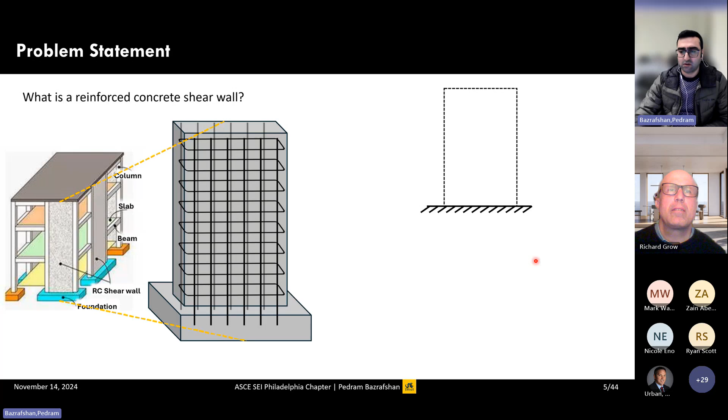So, problem statement. First, I would like to talk about what is actually a shear wall. Most of you know that. We have different structural elements which have concrete shear walls. Of course, they cannot take tension, so we reinforce them. And if we look at this layout for our reinforced concrete shear walls, they're supposed to take lateral loads that push these structural elements toward left or right, and these cause different crack patterns on the surface of these structural elements.

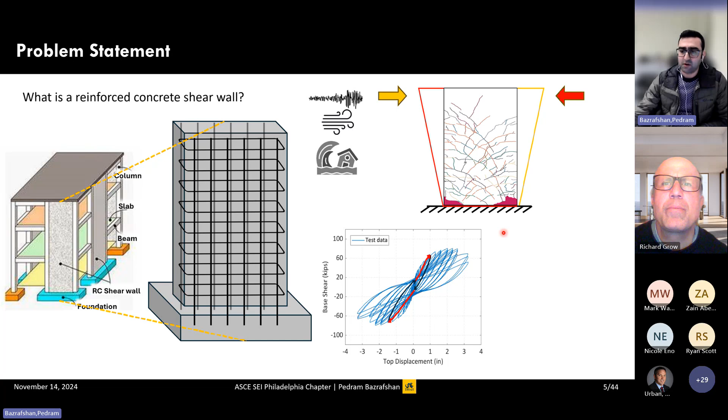Once they are put into testing, we usually plot the results with base shear versus the top displacement, and here we see different cycles of the test. We load the structure, unload it, and load it to the other side, and then unload it again. Each of these crack patterns that you're seeing here in this GIF is coming from an image after one full loading cycle. So after one full loading cycle, we stop the test, we take an image, draw the crack patterns, and then we continue the test.

These blue lines would give us the hysteresis loops of the test, and if we connect all these peak strengths, it would give us this green line. We call it the backbone curve.

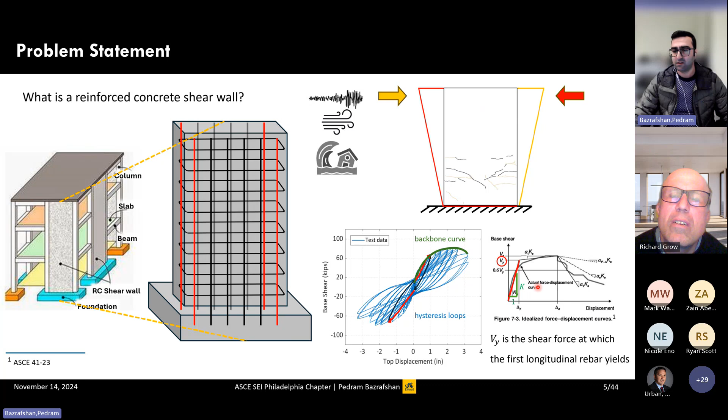There is an idea. I'm trying to set these terms because I'm gonna use them throughout the presentation. So there is a guideline by ASCE 41. I'm gonna talk about ASCE 41 as well. They suggest a way to convert this backbone curve to the idealized force displacement curve. So for that, we have to find Vy, which is the shear force at which the first longitudinal rebar yields, which would be usually these folks that are at the far end of each side of the wall. And then if we connect from 0 to 0.6 times Vy, we would be able to get the initial stiffness of the wall.

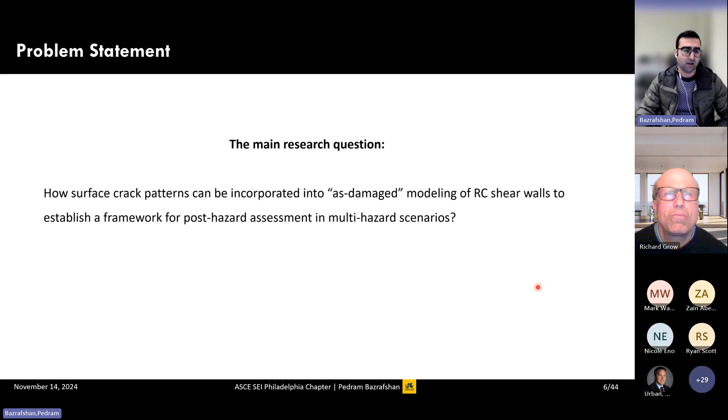With that, the main research question that we want to focus here is how surface crack patterns can be incorporated into as-damaged modeling of RC shear walls to establish a framework for post-hazard assessment in multi-hazard scenarios. There are different elements in this research question, and I would like to walk you through visually.

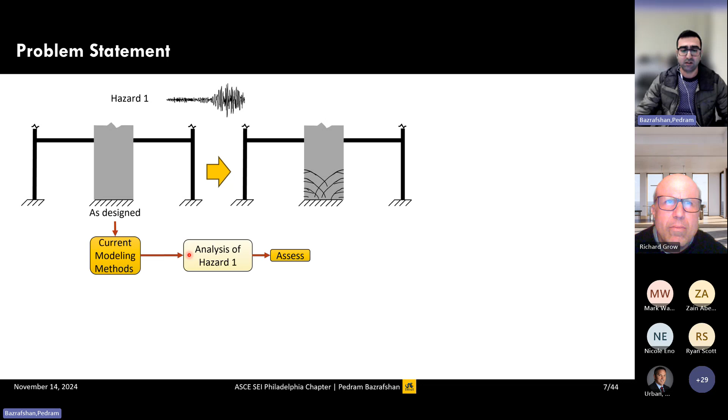So we have a structure and we have the shear wall, and it experiences hazard number 1. With that, we get to this stage that some crack patterns are developed on the surface of the wall, and then we try to make a performance assessment. And this is the current modeling method that we have. We do the as-designed modeling. We perform the analysis of hazard 1, and we then do the assessment.

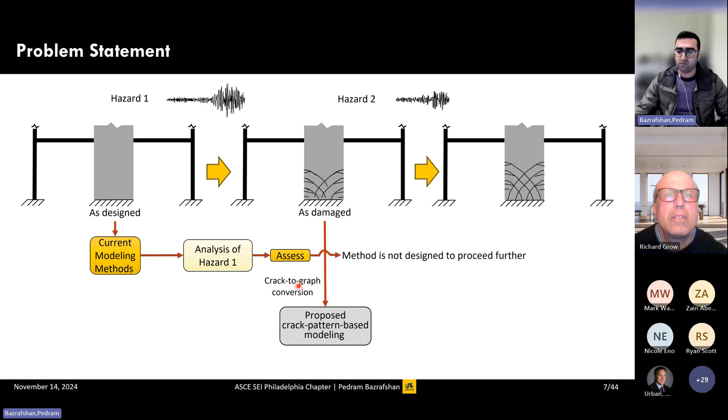But what if we have a second hazard? So as you can see, the crack patterns also develop. And the issue is that this method is not designed to proceed further. But our focus is that we do the as-damaged modeling of the concrete shear wall at the various stages that we're seeing here. So to do that, we want to convert the crack patterns into graph representation. And based on that, we would like to analyze the structure from the second hazard.

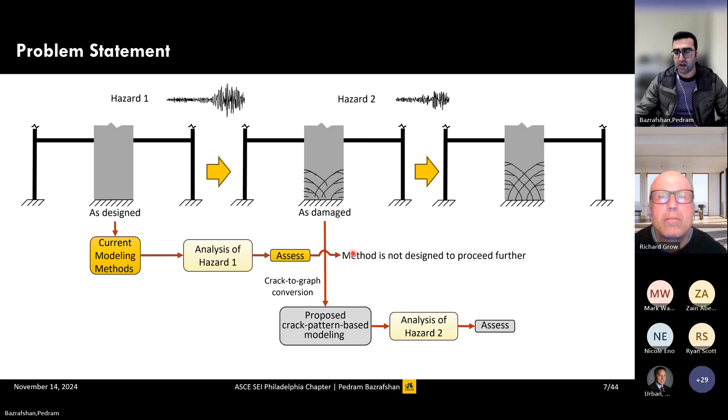Now that we know the problem statement, let's go to the significance and motivation behind the problem statement. There are two major motivations behind this research. The first one is the increasing frequency and intensity of natural hazard events due to climate change combined with the risk of multi-hazard scenarios. So the first one is the increasing trend in induced seismicity. And the second one, some climate change mitigation measures have seismic side effects, such as geothermal energy harvesting and CO2 injection into the ground.

Specifically in the region of Pennsylvania, we have high activity due to these seismic events, which are produced usually by people. That's the reason we call them induced seismicity. One of them is really known for fracking. The third one is that climate change exacerbates the severity of cascading natural hazards following an earthquake, such as the tsunami.

And the last one, climate change may increase the number of natural earthquakes through mechanisms like drought-driven changes in lake water levels or alterations in glacier volumes. The last one is not proven yet, but researchers are trying to investigate the idea because they believe due to global warming, the glaciers are melting down, and this change in the balance in the mass volumes throughout the Earth may cause some earthquakes.

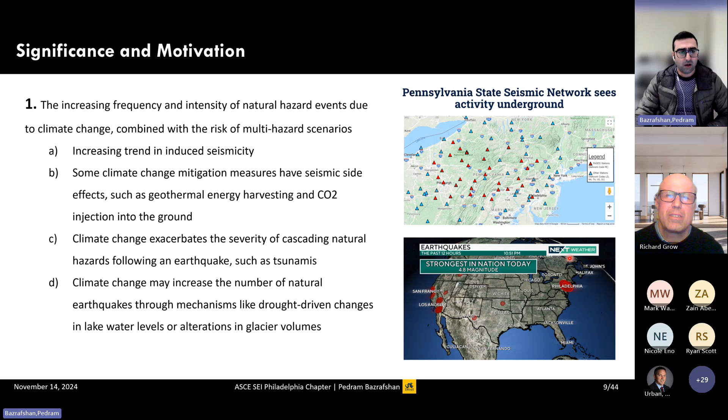A few months ago, if you remember, we had an earthquake in Philadelphia, and it was really rare. And I was watching the news. It was rare to the point that the news was defining what an earthquake actually is to the people. And if you wonder what a 4.8 magnitude earthquake looks like, a 4 to 4.9 magnitude earthquake typically has a maximum modified Mercalli intensity of 4 to 5. And usually the description corresponds to the things that I have written here. What captured my attention was that walls make cracking sounds.

And specifically in the Philadelphia area, wind load dominates, and it is not a high load. And the structures are not designed for seismic activities. And these descriptions are for the situations that the structures are designed for seismic activities. So it is something that we should be noticing for future events.

And the second motivation is the significant gap in current building codes and guidelines when it comes to assessing the performance of structures that have already sustained damage from one hazard and are subsequently exposed to another. So this is ASCE 41-23 that I mentioned earlier. It is developed for seismic evaluation and retrofit of existing buildings. We have the same name for the ACI version, which has a weird name, ACI code 369.1-22. And the last one is from the Applied Technology Council. It is FEMA reports 306 and 307.

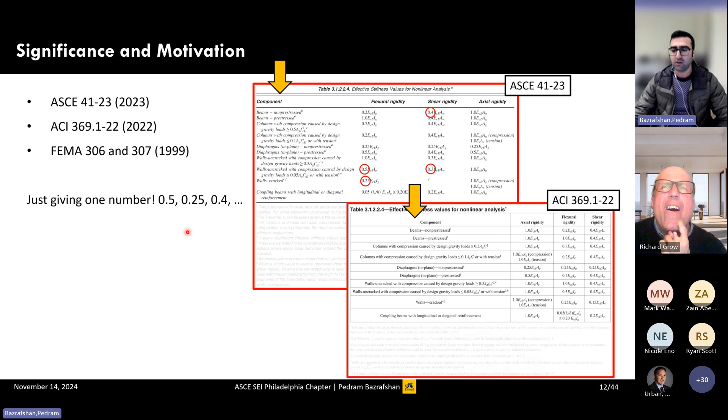But what do we mean by there is a gap in the performance assessment? I would like you to notice the first column here that we have, which corresponds to the structural components. And the issue is that these codes say if you see walls are cracked, just reduce the capacity by 75%. And if you see something else, 0.5, 0.25, 0.4, it's just giving one number. There's no description about it.

And we want to know how many cracks, what type of crack, does the length of the crack matter? Does the orientation matter? But these are not presented in the ASCE 41. So we don't know what to do. And actually reducing the capacity of the walls by 75%, I think this is really conservative.

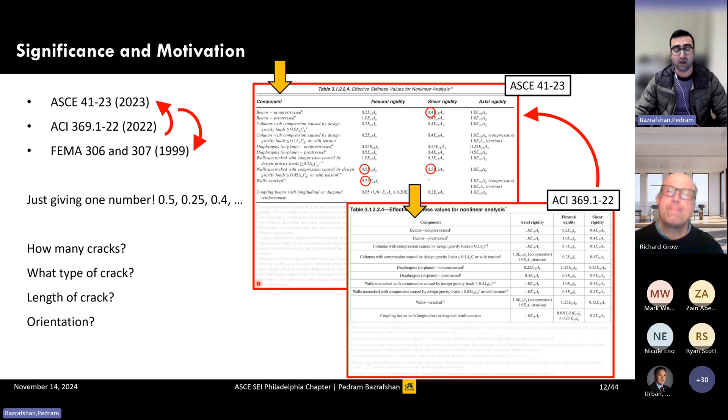So here ACI refers to ASCE. These two tables are very much the same. And these two refer to FEMA 306 and 307, which is really old. It is from 25 years ago, and we're talking about this matter in 2024.

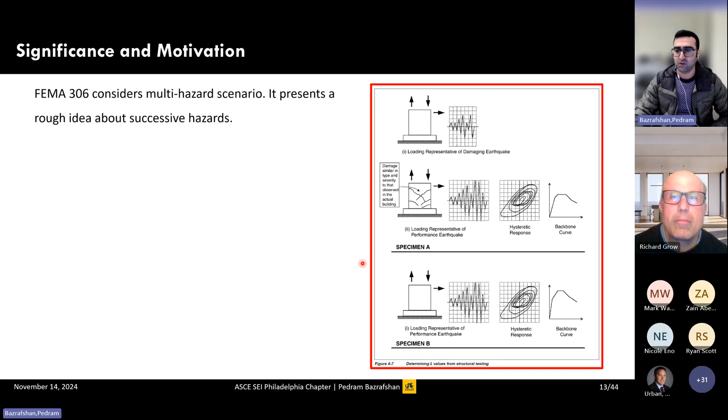So what does FEMA 306 actually consider? It considers multi-hazard scenarios. It presents a rough idea about successive hazards. They had an idea 25 years ago that we have a wall, it goes under one damage, it develops some crack patterns, and we want to perform some assessment after the second hazard. And they compared specimen A and specimen B. For specimen B, there is only one hazard. So we want to be able to compare these two events.

So I think there was a generation of researchers focused on seismicity back then. Maybe they knew the issues, but they faced some limitations. And after 25 years, probably they are retired right now. 25 years ago, there were limited tests, and therefore they only had the rough idea to present, but they couldn't move forward probably.

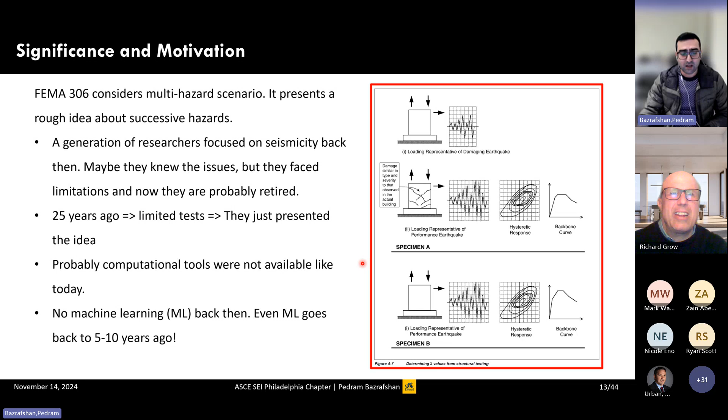Another thing is that probably computational tools were not available like today. We have access to high performance computing systems, and it wasn't available back then. And even if it was, probably it was for military usage. The last one is that machine learning was not available back then. Machine learning only goes back 5-10 years. And also test data is still limited for AI and machine learning. I'm going to talk about what I mean by limited test data and why it is actually limited.

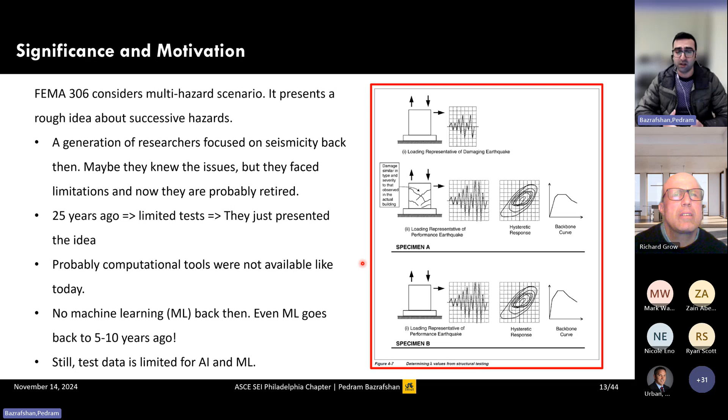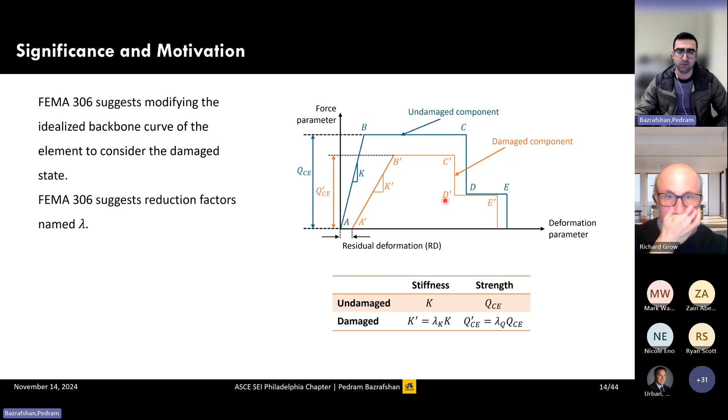So what does FEMA suggest? FEMA suggests that we can modify the idealized backbone curve that I mentioned in ASCE to represent the damaged state of the structure. So initially, they believe that if this is the blue line, the undamaged component, we should be able to define some lambda values that if we multiply these lambda values by the initial stiffness or initial strength, we should get to the damaged state of the component.

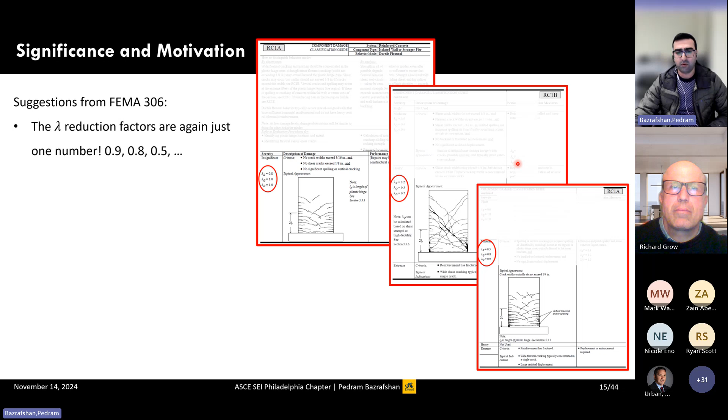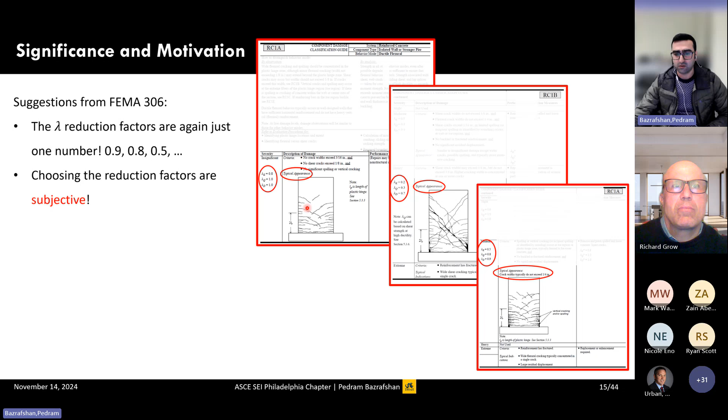But what we actually see in FEMA 306, this is why I'm calling it a rough idea, it was not developed further. I grayed this part because I just want you to focus on the other parts. But the issue is still there. It's only giving us just one number, and where is that number actually coming from? Again, it is 0.9, 0.8, and it is basically saying that if the typical appearance of the crack pattern is something like that, choose those numbers, and it is pretty subjective. One person might think the actual crack pattern that they're seeing is close to this one, another to that one.

Another issue is that here it mentions crack widths typically do not exceed a quarter of an inch. But crack width closes under cyclic load. If you look at this video, you can see under cyclic load, the width of the crack closes. So it's not a reliable measurement here.

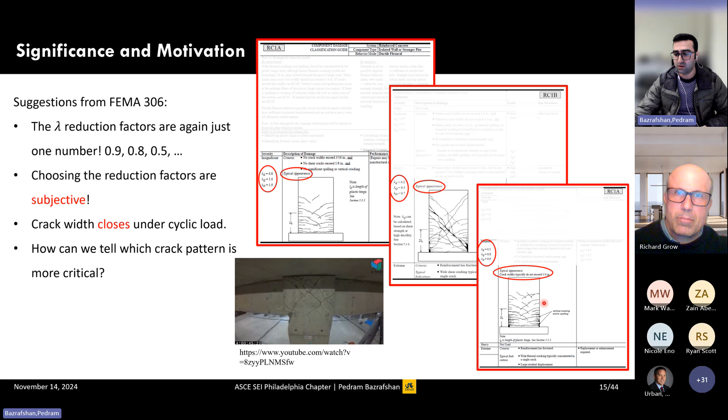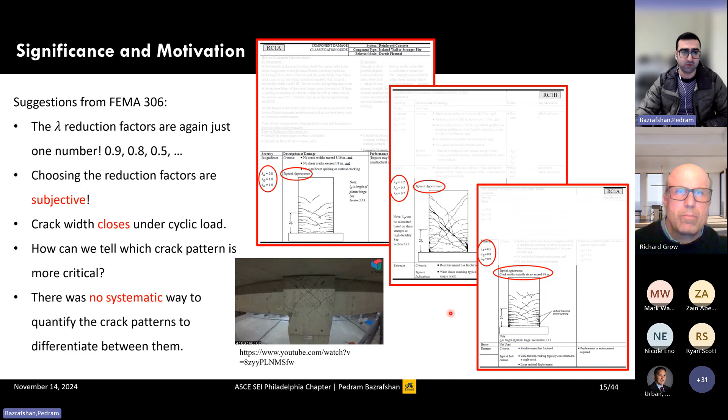But the question here is how can we tell which crack pattern is more critical? Is it this one, this one, or this one? What is the difference between them? Which one is worse? So I can say there was no systematic way to quantify the crack patterns to differentiate between them. So this is one of the motivations of this presentation.

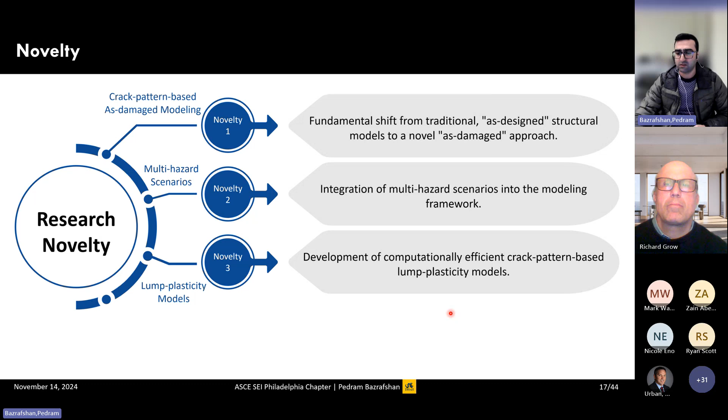Now, what is the novelty of our approach? The first novelty is a fundamental shift from traditional as-designed structural models to a novel as-damaged approach. The second one is the integration of multi-hazard scenarios into the modeling framework. Third is development of computationally efficient crack pattern-based lumped plasticity models. I would like to highlight the computationally efficient part. I'm going to refer to it in the conclusion section.

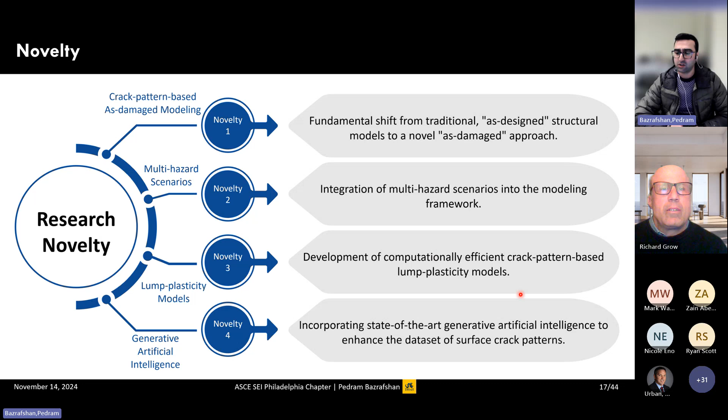And the last one is incorporating state-of-the-art generative artificial intelligence to enhance the data set of surface crack patterns. With that, let's move to the research objectives. So we have the experimental data that I showed you in part in the first slide, the hysteresis loops and the crack patterns. We have that for several tests that have been performed in the US.

We would like to first expand this data set by using AI, and then we would like to convert the crack patterns into their graph representation and use those graph features to be able to predict the reduction factors for the stiffness and modify the lumped plasticity modeling. On the other side of the branch, we would like to simultaneously develop the distributed plasticity modeling.

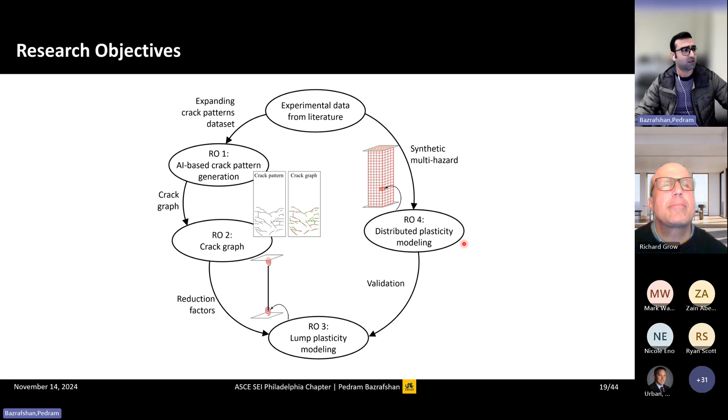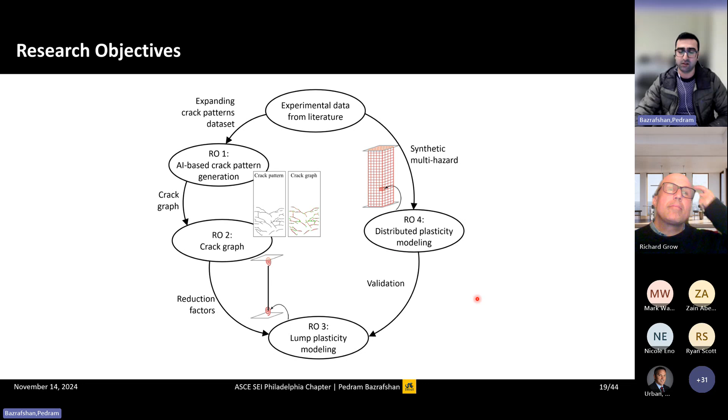This would give us the superiority to compare the results from the finite element here, which is very detailed, and compare it with the lumped plasticity modeling, which is a little bit simplified.

Now, the first objective, AI-based crack pattern generation. So here we used denoising diffusion probabilistic modeling, which was presented in 2020 by Ho and his colleagues. The idea is that if we have an image of a crack pattern, and we add noise to this image gradually until it is pure Gaussian noise, usually in very gradual steps, like 1,000 steps, we should be able to train models that denoise the images step by step until we get to the initial image.

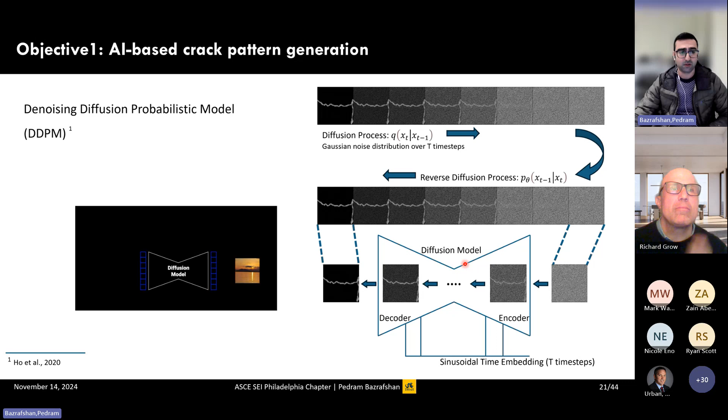So if you wonder how the model generates crack images, the idea is that once the model learns how to go from pure noise to the original image, if we give the model random Gaussian noise, it would eventually be able to denoise the image until it generates new images for us.

So with the first objective, there are 3 tasks. For the first task, we wanted to see the feasibility of this generation. So we generated 64 by 64 patches of images. That's why the images you saw were really small. And we have a journal paper under review on this task. The second one is that we want to generate higher quality images of 128 by 128 patches, which is essentially 4 times the images we generated before.

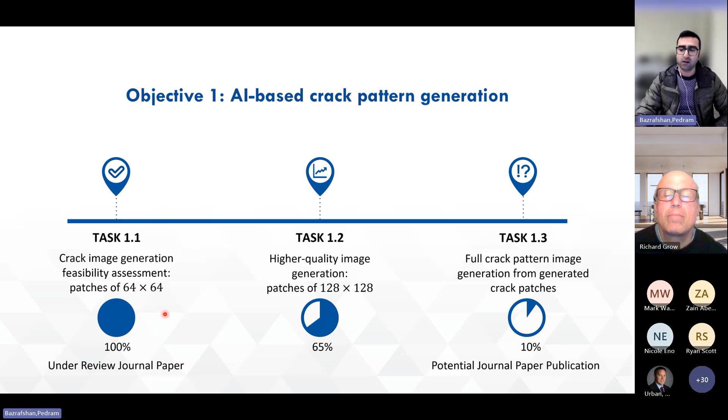And it is really resource intensive when you want to generate images with higher quality. And at the end, we want to be able to connect these patches so that we have the full crack pattern of the image.

The next question is why we use graphs. The first one is that it is based on mathematics, so it would be unbiased. If you remember, we talked about the subjectivity of understanding different crack patterns. So mathematics gives us the benefit that it is unbiased and can objectively compare these crack patterns with each other. Second, graphs are the building blocks of AI, and they enable automatic and systematic analysis.

With this, we would be able to assign numbers to these crack patterns, which is called crack pattern quantification. Essentially, we're converting something qualitative to something quantitative. This way, we will have a way to tell which crack pattern is more critical or which one is worse.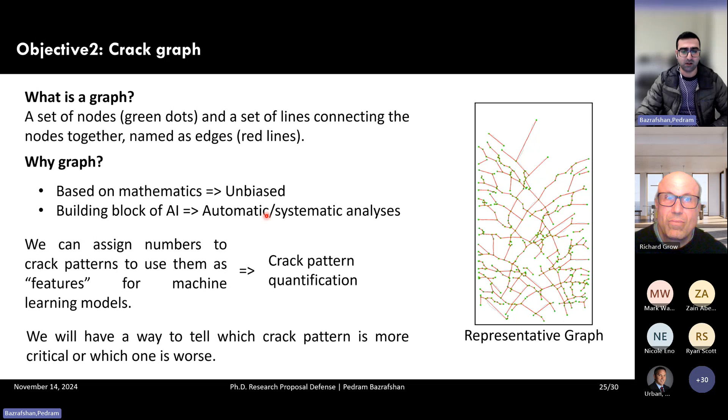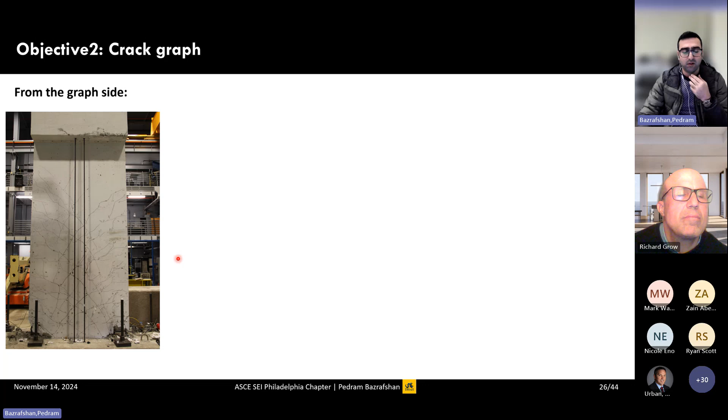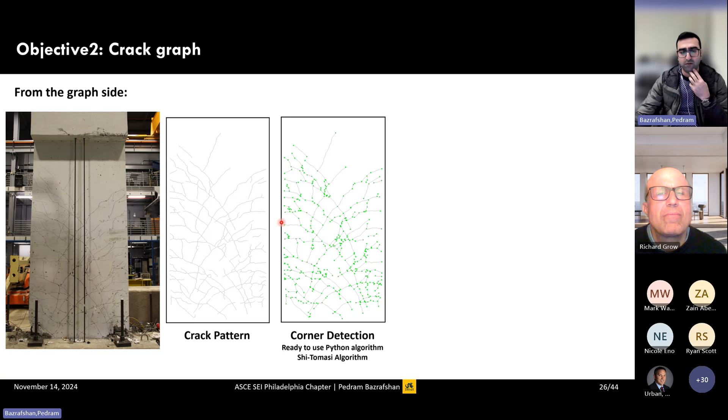The crack to graph conversion has two sides of the story. Now, I would like to start with the graph side in the beginning. So this is an image of the shear walls that go under test in the laboratory, and you can see crack patterns developed on the surface. So what we do, we sketch these crack patterns at the beginning, and then we use corner detection algorithms. I specifically used the Shi-Tomasi algorithm to find the starting point, crossing point, and end point of these crack patterns, and we mark them with these green dots.

These would be our nodes. Now the idea is to connect these nodes together based on the crack patterns. So we developed another algorithm to connect these corners together. We call it corner connection. So here it visualizes the idea. For example, node number 2 and node number 6 should be connected to each other because there is a crack pattern connecting these two together. But nodes number 2 or 3 shouldn't be connecting to 1 because there isn't a crack pattern. If we follow this guideline, we can see that the crack pattern that we had initially here is now converted to its representative graph.

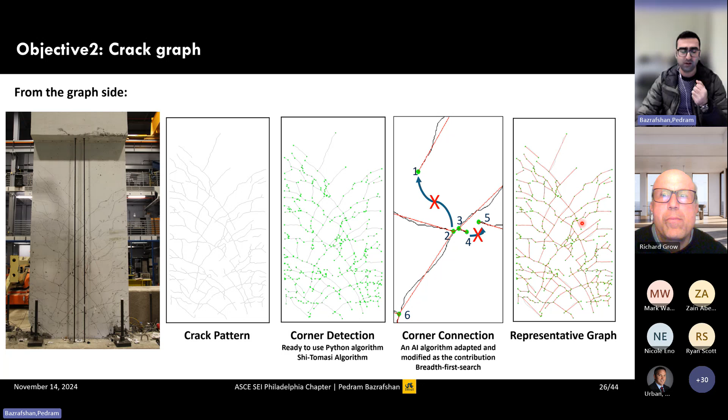Now that we have the graph, we would like to extract graph features to assign those numbers that I mentioned to the graph representation. So imagine this is a network. This is a graph that we have. This is how we calculate the graph features. For each node, we count the number of edges connected to it, and we give a number to these nodes. We call these numbers node degrees. For example, here we have 3 edges coming to this node, so its node degree is 3, this one is 2, and this one is 4.

One of the features that we use here is called average degree of network, which is simply averaging these numbers out. And with that, we get this plot. As you remember, for each of the load steps that we had, we stopped the test and we had the crack pattern. And if we convert the crack pattern into a graph and calculate the average degree of network, it would give us this point on the curve.

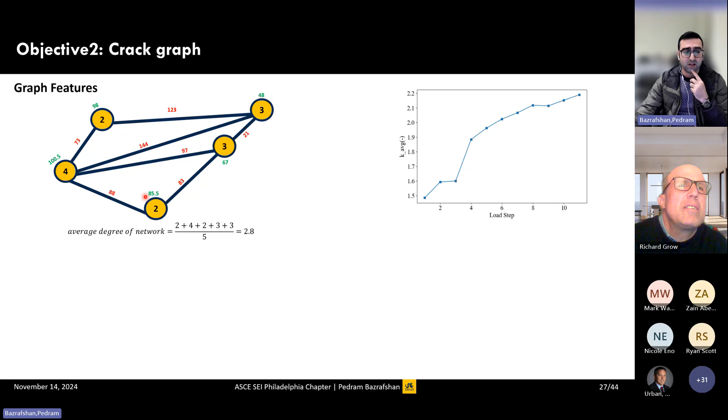The second feature I would like to mention is, for example, we have this crack length. Imagine these red numbers are showing the length of these cracks. The weighted degree of the network would be the average of these two numbers. For example, for this node, that would give us 98. And then if we do the same for all of the nodes, we would be able to get the weighted degree of the network. If we average those, we would get weighted average degree of the network, which would be the average of these green values.

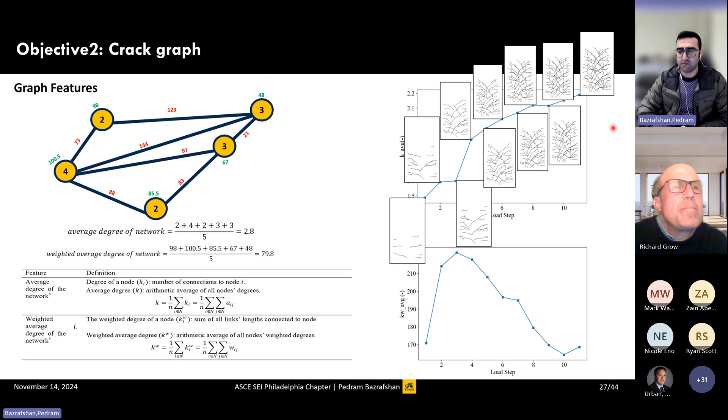And for each of the crack patterns, we should be able to plot weighted average degree of the network versus the load steps. You can see the crack patterns are developed through the test, starting from some disconnected cracks, and at the end we have a very intense cracking pattern at the end of the test. And of course, these graph features have mathematical equations.

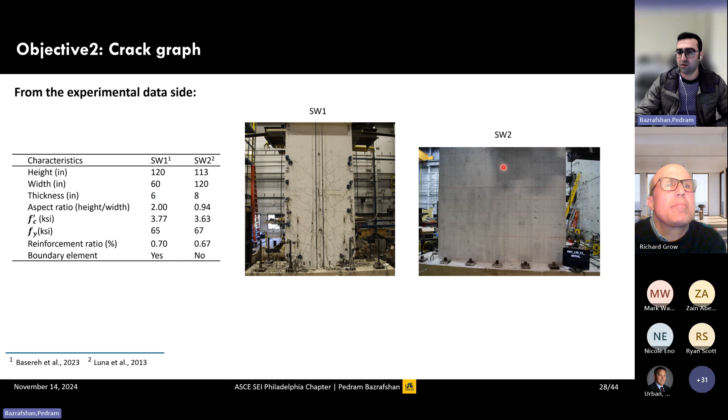Now that we learned about the graph side of the story, let's move to the experimental side of the story. So these are the two shear walls that we wanted to use to test our idea. The first one is called SW1, shear wall number 1, and shear wall number 2. These are the characteristics of the walls. If you wondered, they are called large-scale tests because if you compare them with the average height of a person, they are still taller. Even if you are 7 feet tall, these walls are still taller than you.

And these are really expensive tests, and this is the reason that I was mentioning there is limited test data, back then and still now. To give you an idea, the actuators that are used to push and pull the top of the wall cost hundreds of thousands of dollars, if not millions. And only a few schools in the entire United States have the ability to do large-scale testing. This is why these test data are really precious and really rare.

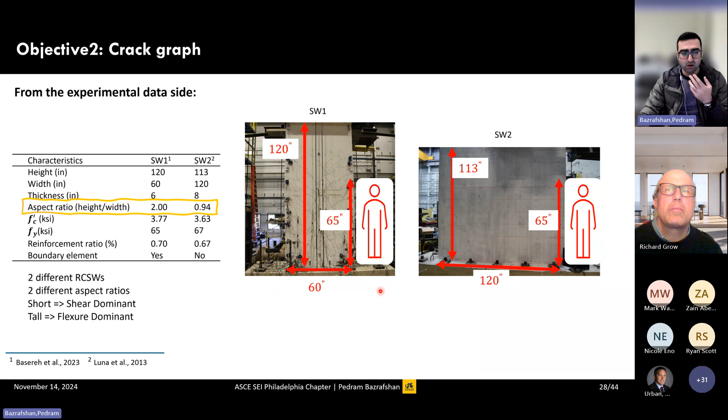So we have here two different shear walls, and they have two different aspect ratios, which usually show the dominant behavior of the wall. If it is less than 2, they are usually considered to have shear dominant behavior, and if they are 2 or above, they're usually considered to be flexural dominant.

So these are the hysteresis loops that I showed you earlier. It is showing base shear versus the top displacement. If you remember, our goal was to find these lambda values that, if we multiply them by the initial stiffness, we would be able to get the stiffness for the damaged state of the wall. So for that, again, I'm showing this graph. We use the idealized backbone curve. So first we have to find Vy, and then we multiply that by 0.6 Vy, and this would give us

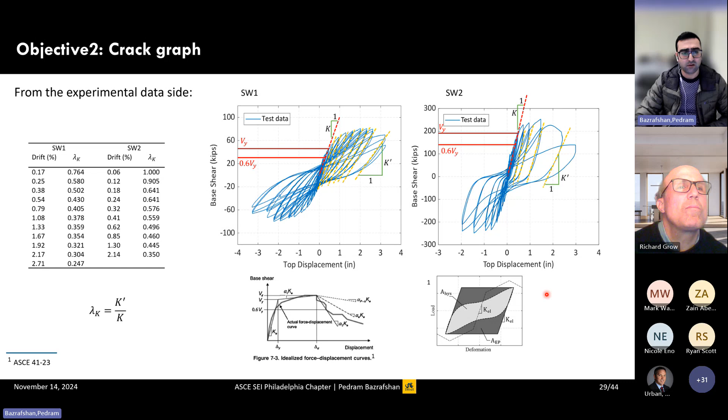the initial stiffness. For the damaged state, one of the issues that we had throughout this project, you're hearing the success story, but we had to go back and forth between these guidelines, ASCE, FEMA, to define different parameters. So to get the stiffness of the damaged state, ASCE suggests to use the unloading slope for that purpose. So we got these slopes from the unloading slope, and it gave us the stiffness of the damaged state of the structure. And with that, we were able to calculate the lambda values for both of the walls.

Now that we have seen the story from the graph perspective and from the experimental perspective, we have to marry these two worlds together. So remember that we had this crack pattern, then we converted the crack pattern into its representative graph, and we want to get some numbers to be able to convert the undamaged state to the damaged state. So these are the lambda values that I showed you in the previous slide and in the table. This is the ground truth, and we use the graph features to predict these lambda values. And as you can see, we're getting a pretty good match between the ground truth and the lambda values.

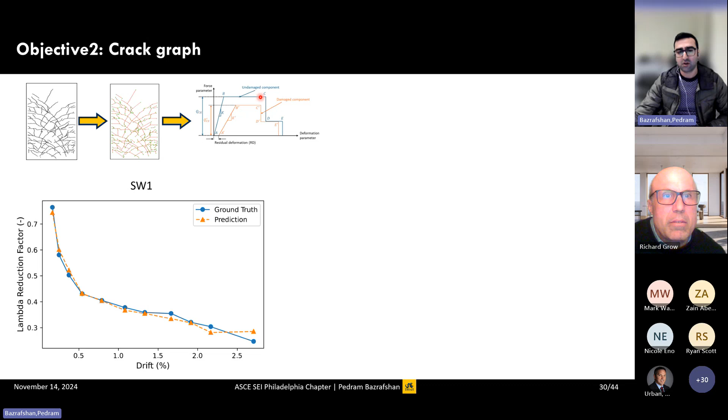So it is showing us that if we look at these crack patterns and convert them to their graph representative, we would be able to tell how much we should modify this undamaged component to get to the damaged state. And this is the graph for the second shear wall that I showed you. Again, we're seeing a great match for these two shear walls. And if I want to talk about the errors, we're seeing that the errors are about 4% or 7% for each one of the walls, and the coefficient of determination is 0.98, 0.94. The closer it is to 1, the better. And these are the equations outlined for each of the walls.

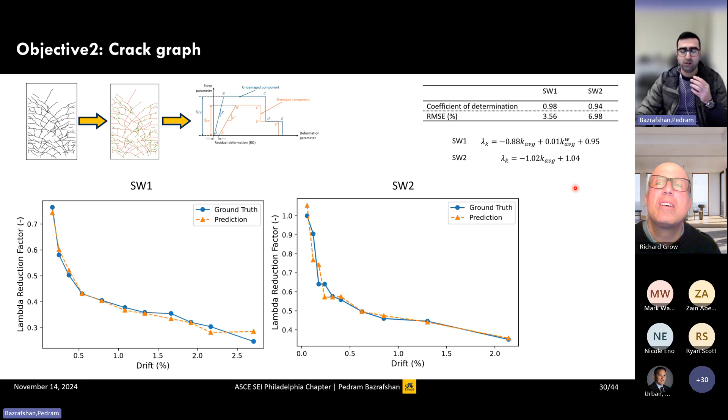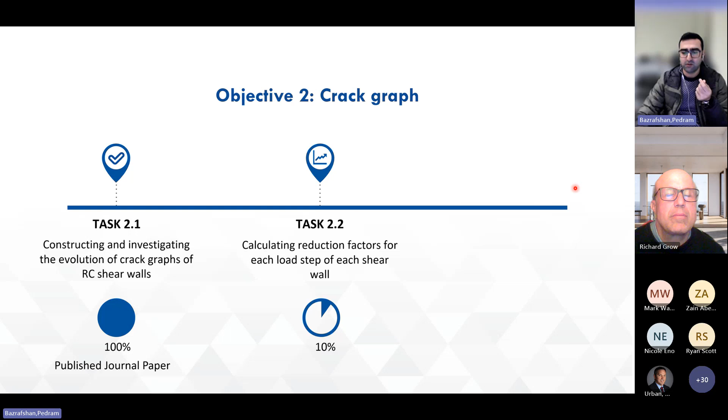So the second objective has, again, 3 tasks. Constructing and investigating the evolution of crack graphs of RC shear walls. This is the paper that Mike mentioned, and we published that. The second one is calculating reduction factors for each load step for each shear wall. And the third one is performing a regression analysis. The idea for task 3 is that we used the crack patterns from one wall to predict the lambda values for the same wall.

Now, we have this idea to present an equation that is based on some shear walls, and we can get the lambda values for other shear walls. This way, we would be able to generalize the idea, because if we go to a real scenario, what we have is only a crack pattern, and we would like to be able to calculate the lambda value for that specific scenario.

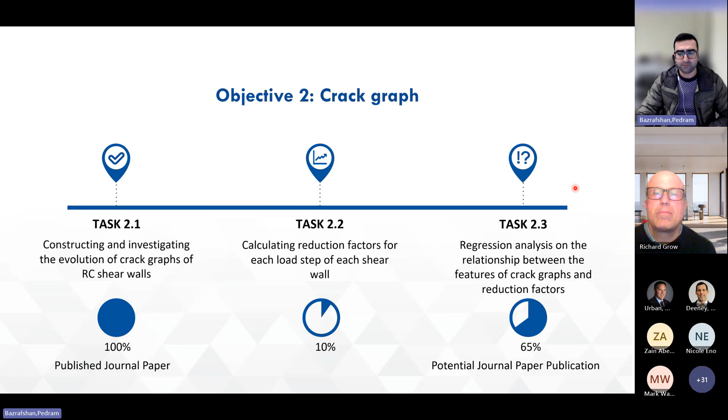Now, the third objective, crack pattern-based lumped plasticity model. So for this one, we used OpenSees for the lumped plasticity models. We used the fiber-based model with linear elastic element to model the wall, which is outlined with this black line. And then we used zero-length nonlinear spring hinges in series, and we put them in critical points where the shear wall might face some plastic deformations, and we used Pinching4 material to capture the nonlinear behavior of the wall.

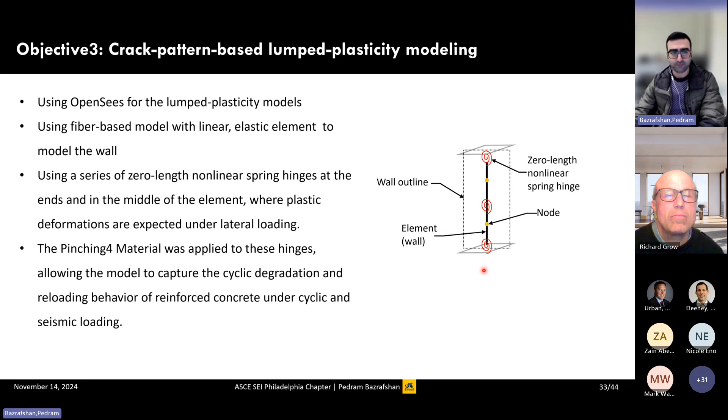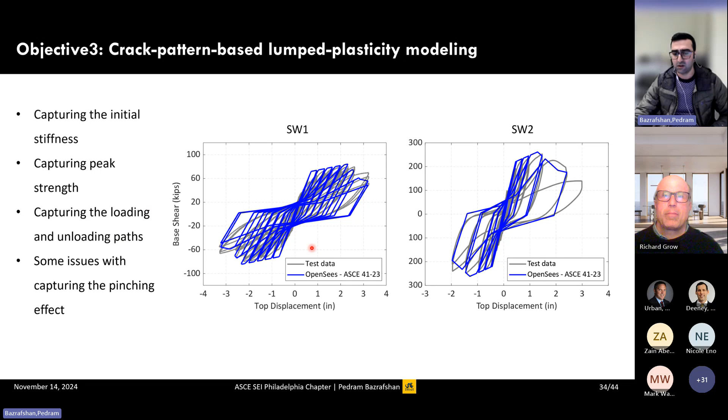So these gray lines are again those blue lines, the hysteresis lines that I showed you before, and these blue curves are showing the results from OpenSees that we use to capture the behavior of these shear walls. So they're showing that we were able to capture the initial stiffness of the wall. We were able to capture the peak strength of the walls with maybe 5% tolerance, and we saw a very good match with the loading and unloading paths of the walls, but there were some issues capturing the pinching effect that we still have to investigate further.

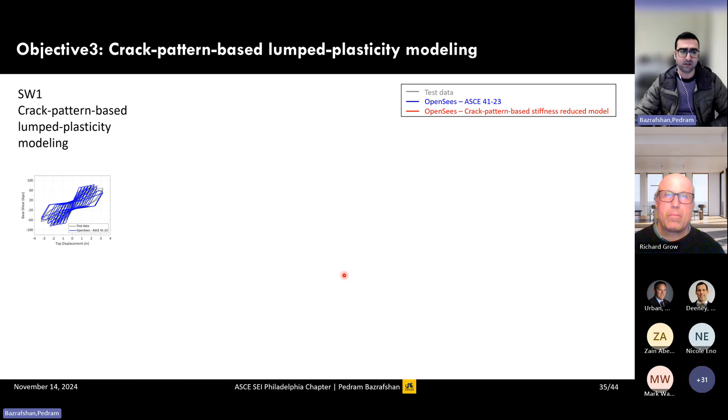Now, let's talk about the multi-hazard scenarios. So SW1, crack pattern-based lumped plasticity modeling. We saw this curve on the previous slide. Now, the idea is that we have the test data, the hysteresis loop. So we want to consider until a certain cycle as the first hazard, which is grayed out here in this part, and consider the rest of the cycles as the second hazard, which would be these dark black lines.

So the idea is that we see this crack pattern, and then we convert this crack pattern into some lambda values, and then we modify this blue model with those lambda values to get to these red lines here. These red lines are supposed to capture the behavior of the wall that is shown in the dark black lines. The idea here is that the wall has sustained damage after 6 cycles, and we want to be able to model the behavior of the wall from cycle 7 until the end of the test.

And remember that we didn't have any prior information regarding what loading has been applied to the wall so far. What was the stress-strain that the wall experienced? Nothing, just the crack pattern. We just looked at the crack pattern, we got the lambda values, and then we modified the model to capture the behavior of the wall.

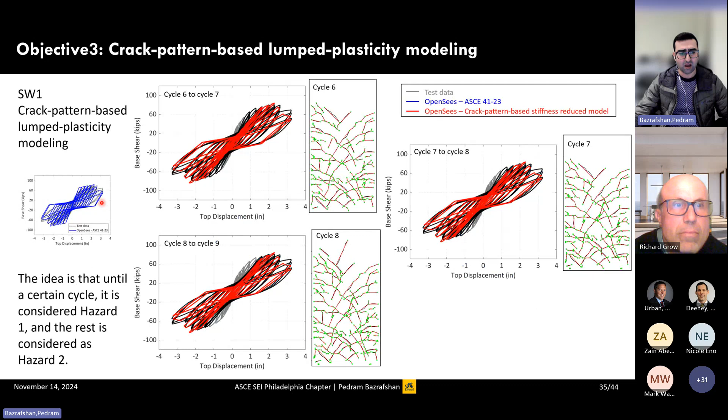Here, from cycle 6, the first 2 cycles were not captured very well, but essentially we were able to capture the peak strength, the loading and unloading path, and the pinching also seems to be a little bit better than this blue line. We have a gap here, but here it is matching better.

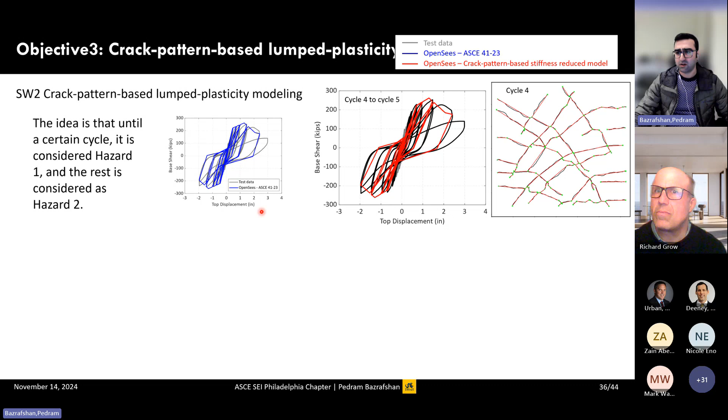The same idea is here for the second shear wall. We had this test data, and we tried to get a match with the lumped plasticity model. So we started from cycle number 4 to cycle number 5, 5 to 6, and 6 to 7. Again, we're seeing that we're getting a very close match with the wall just by looking at the crack pattern developed on the surface of the shear walls.

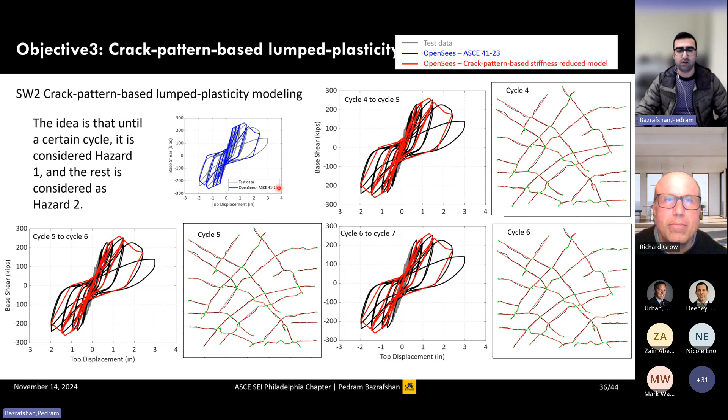Again, I would like to emphasize, we didn't have any prior information on what was the loading history that was applied to the wall. Nothing, just looking at the crack pattern, converting this crack pattern to its representative graph, and then getting the lambda values to be able to modify the backbone curve of the lumped plasticity models and get a match with the rest of the wall.

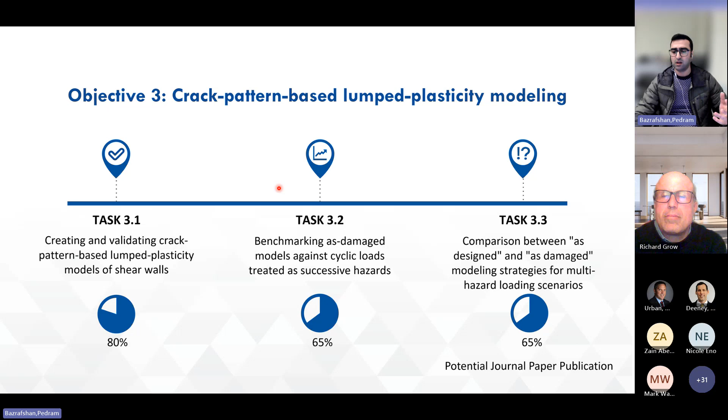So here, the tasks are creating and validating crack pattern-based lumped plasticity models for shear walls. The second one is benchmarking those models, the as-damaged models, against cyclic loads. And at the end, we would like to be able to compare the as-designed results that we get with the as-damaged scenarios.

The last objective is distributed plasticity finite element modeling. So for that, we used LS-DYNA for the distributed plasticity finite element modeling. The distributed plasticity models can capture both the geometric and material nonlinearity, and it would be more precise. And for the concrete, we used the Winfrith material, which is known to be the best material that has been suggested in the literature to capture the behavior of concrete. And we use an implicit solver for these models.

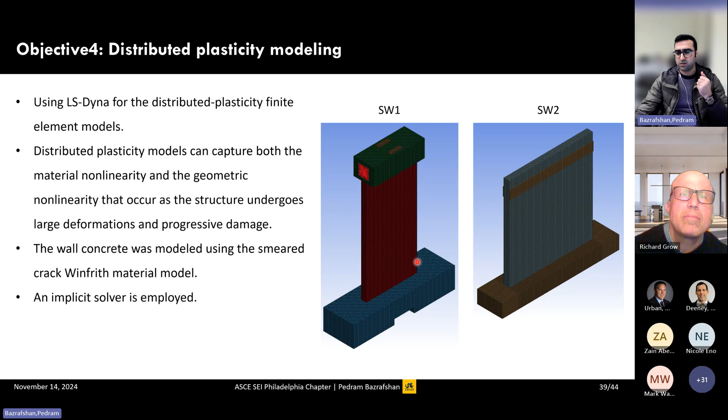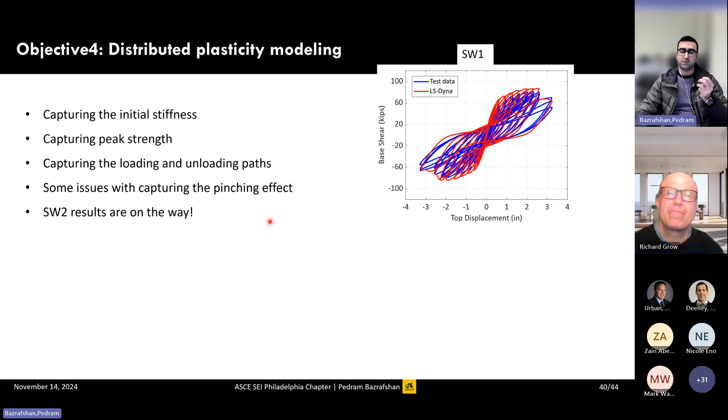So you're seeing the LS-DYNA model for the first shear wall and for the second shear wall. So for the first shear wall, we were able to capture, again, the initial stiffness, the peak strength, the loading and unloading path, but there were some issues with the pinching effect. Unfortunately, we ran into some issues with the computational resources, so I don't have the results for SW2 ready right now. The idea is that we use LS-DYNA results to be able to compare them with the lumped plasticity models.

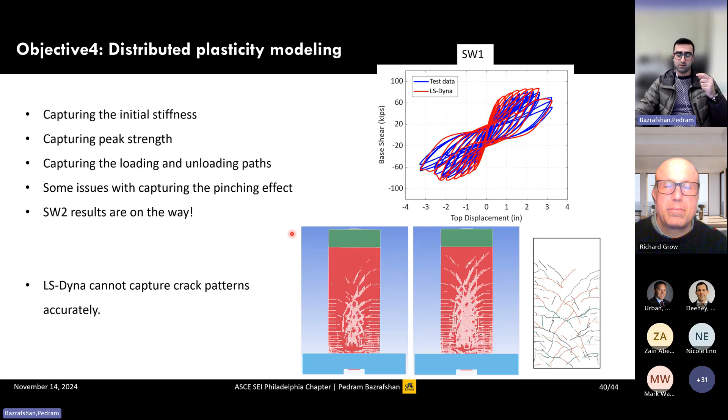Now, one issue that I would like to highlight here is that today, while we're talking about this idea, we still have issues with computational software in terms of capturing the crack patterns. Here is the GIF that I showed you on the first slide, and it is actually coming from different load steps of SW1. There is no stage where you can see the crack pattern match with the materials here in LS-DYNA, although the hysteresis loops have a very good match with the actual test data. So this is a part that requires heavy investigation and research for future works.

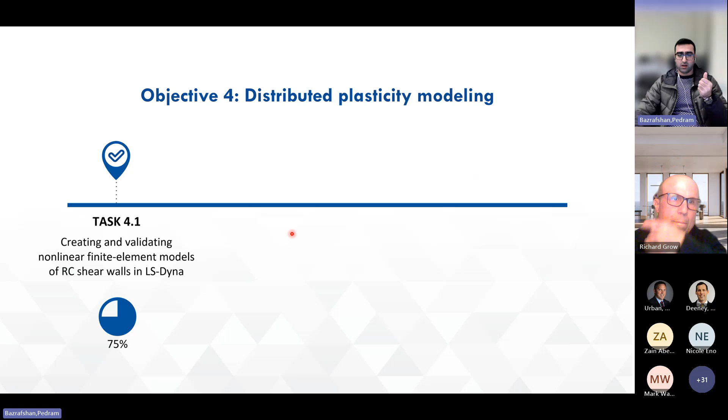Here, our objective is to create and validate nonlinear finite element models for RC shear walls within LS-DYNA. And then we would like to do a numerical simulation of synthetic multi-hazards. Up until now, we used the cyclic loading as the multi-hazard idea, considering from the starting point until a certain loading cycle as the first hazard and continuing the rest of the cycles as the second hazard.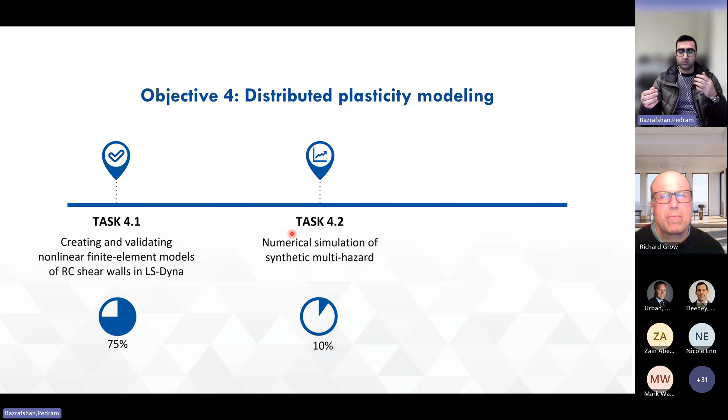We would like to be able to consider until a certain load cycle as the first hazard, and maybe use actual records of earthquakes to continue the second hazard. That's why we're trying to develop these distributed plasticity models, because the actual test data is limited. So with this finite element model, we would be able to verify our lumped plasticity models.

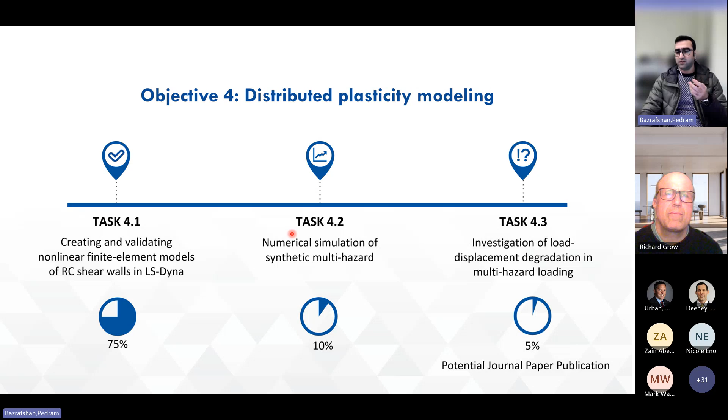The last task here is investigating the load-displacement degradation in the multi-hazard scenario that I described here. And conclusions: application of state-of-the-art generative AI for crack image generation was presented and investigated; a novel graph-based method was presented for systematic and objective crack pattern quantification; a novel physics-based approach for employing quantified crack patterns into numerical models was presented; and a practical framework for assessing RC shear walls under multi-hazard scenarios was presented.

The presented approach addresses a long-lasting gap in the standards, engineering codes and guidelines. And the presented crack pattern-based lumped plasticity modeling is suitable for rapid post-disaster assessment. This is the part that I mentioned earlier, the computationally efficient model.

If you remember, a few months ago we had a hurricane in Florida, and there is a city, Fort Myers. The city sustained 2 hurricanes in just 2 weeks. So imagine you have to do rapid post-disaster assessment in only 2 weeks, and we're talking about large scale, in structures and in cities. So developing detailed modeling would not be an efficient way in a short amount of time.

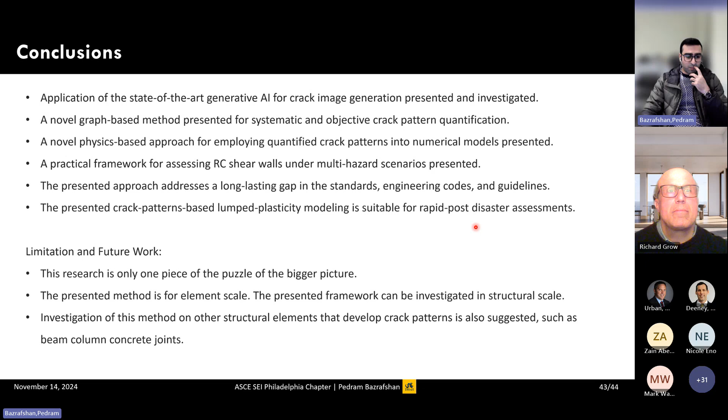And we would like to investigate this method on other structural elements that develop crack patterns, for example, beam-column concrete joints. With that, I would like to thank you for listening to this presentation, and I would take any questions.